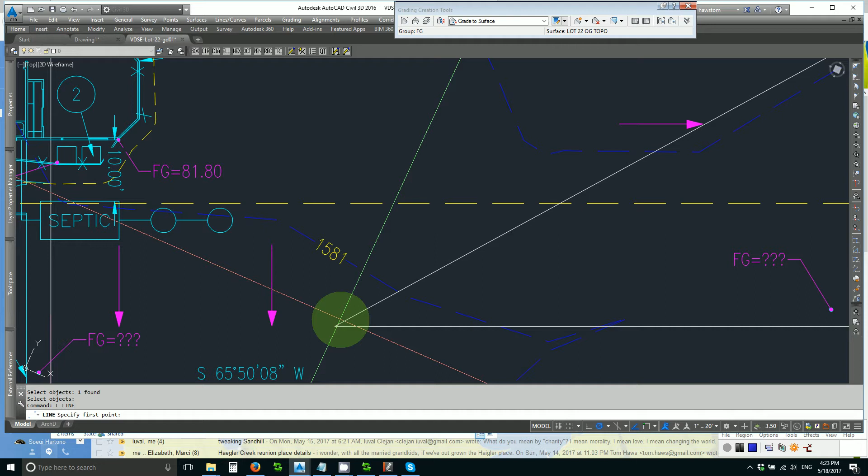My basin pre-design is done, and I have a polyline that I think represents what will be the bottom of the retention basin. The only thing that's missing is a finger up to the outfall that I have identified, so I will draw an arbitrary line across the vertex of this triangle and turn it back, leaving a little gap from which I can extend this closed polyline out to my outfall and back.

That's really important because I can easily do a projection grading with a closed polyline, so I'm going to use the join command. Now we're talking. I'm going to use fillet radius 2 to make these other corners pretty, and I think we can work with that.

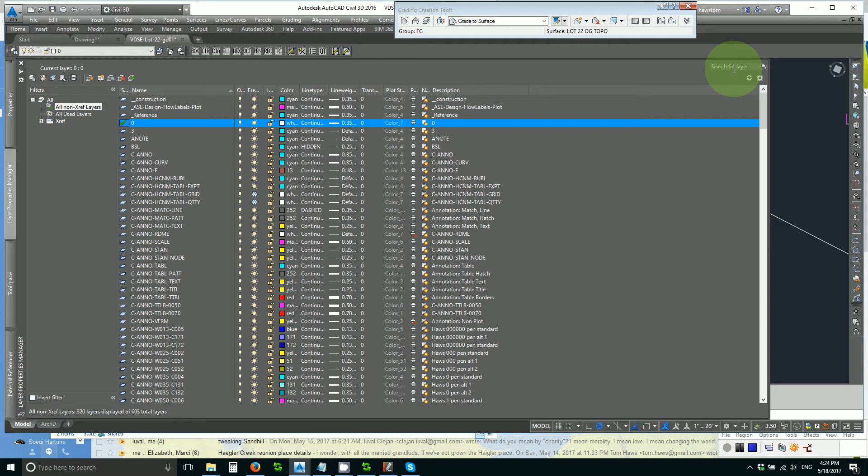I'm going to change this - let's look for all our feature line layers. I'll change this to a warp line since it's the bottom. What I'm doing here, I call it a tactical retreat. Then I'll turn it into a feature line on the finished ground layer, FG.

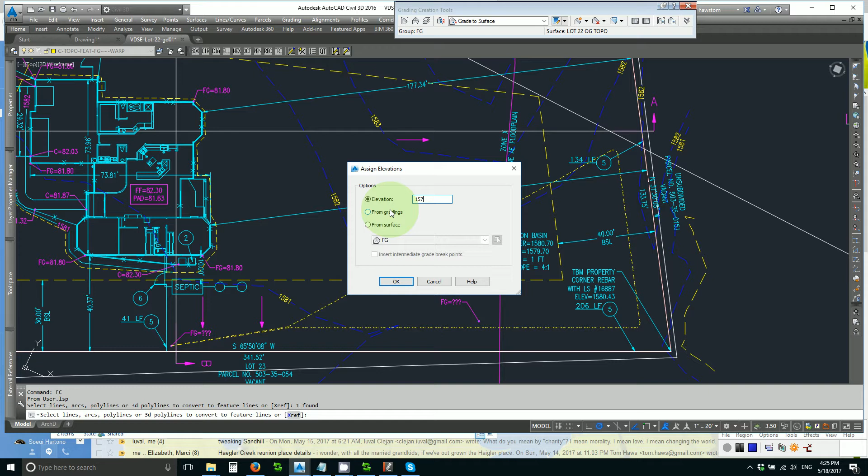I'll assign it to 1579.7, which is 1 foot below my high water. You'll see the high water before was 80.7, and when I hover here, it's going to outfall at about 80.73. So my high water is 80.7, and this feature line has been set at 79.7.

Now all I've got to do is raise this point to 1580.7, since that is my finger and that's where it's going to overflow. Now I can just do the projection grading. It's that easy.

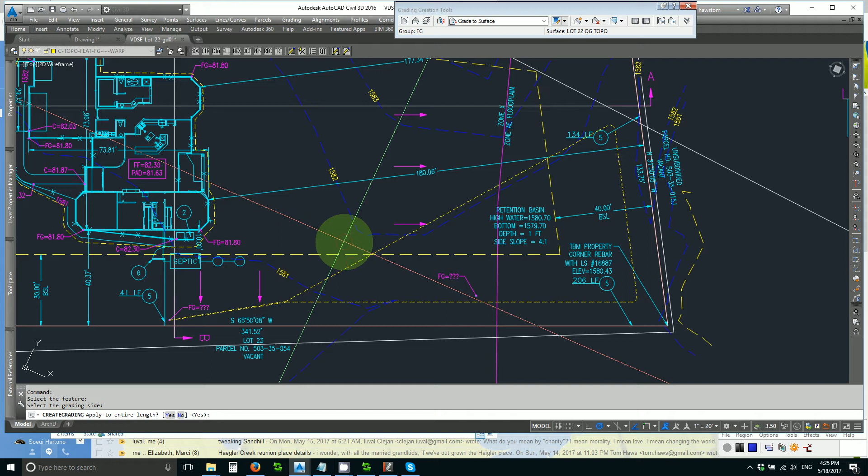No effort. Do you know what's missing? See if you can guess, or if you're ahead of me - I'm going to look at the object viewer, look at an isometric view, and there's a hole in my basin I need to infill.

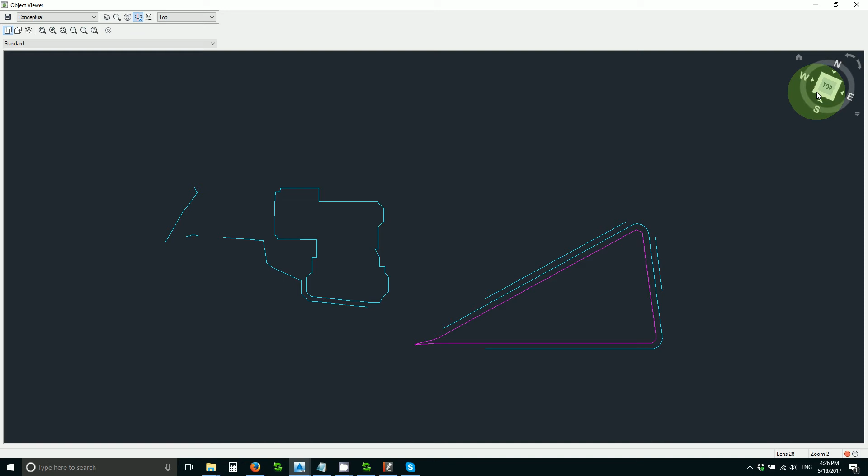The infill's done, and if I hover, I now get high water and finished grade, 80.7 and 79.7, and my object viewer will now give me a beautiful picture of my basin with my finger.

All I need is my volume, and my grading group can give me that. 5894 - I've become a little bit short, so I have to start over again.

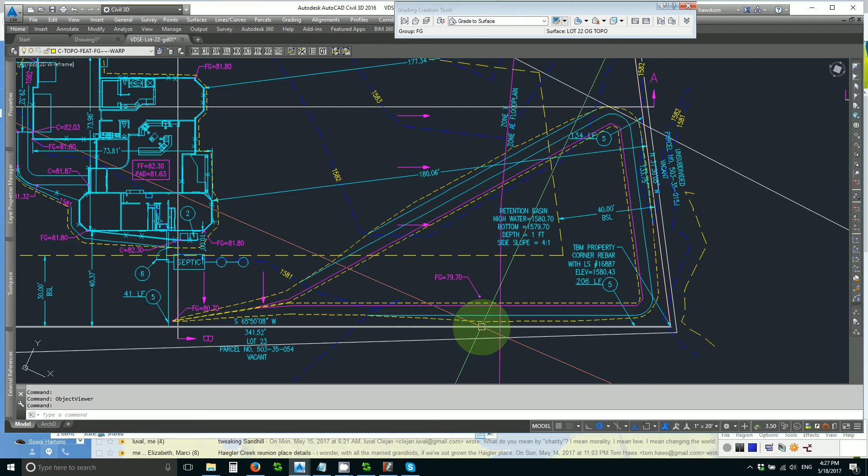I'm going to pause the video while I make it a little bigger. I've erased and exploded everything, but before I can continue, I need to flatten everything, because Civil 3D does not like to make funny 3D polylines.

Now that it's flat, I can offset it a little bit, and I'll pause while I finish.

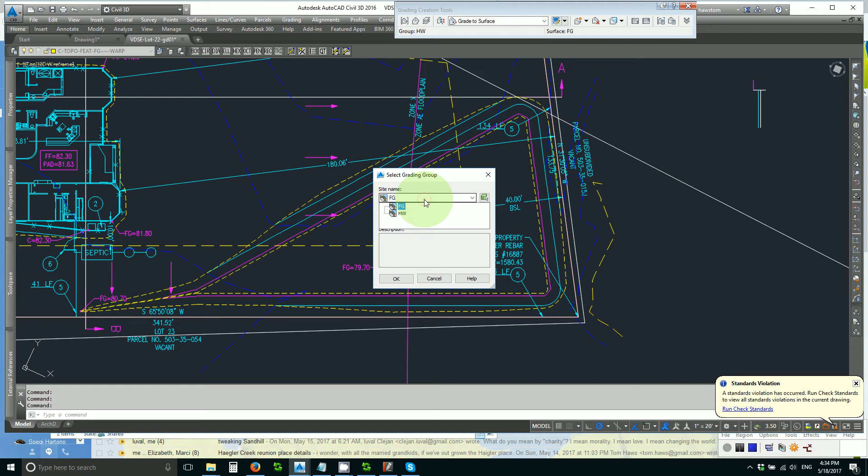Well, whoopsie daisy, I made a little mistake. I was looking at the FG group volumes, which are dirt volumes. I need to be looking at the high water group volumes, which are the retention volumes, and that's 6310, which is almost perfect in the first place, as our pre-design suggested we would be.

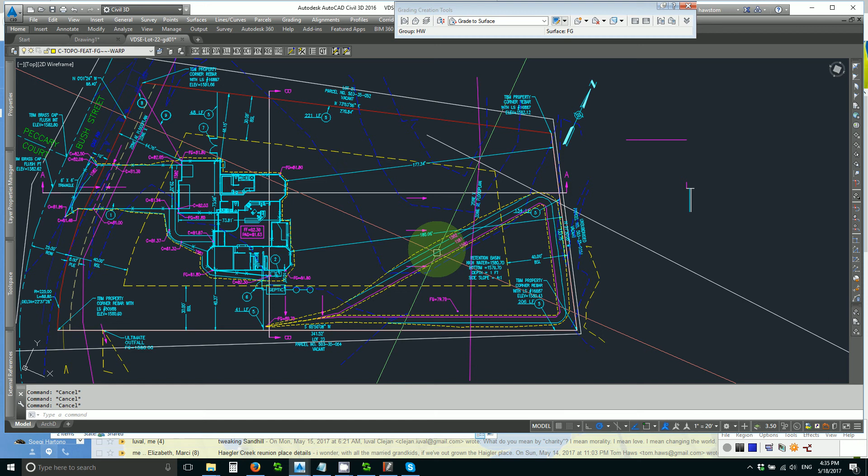Okay, we'll right click on our surface, go to properties, and under analysis, user contours, we'll say we want one, and we'll make it at 1580.7.

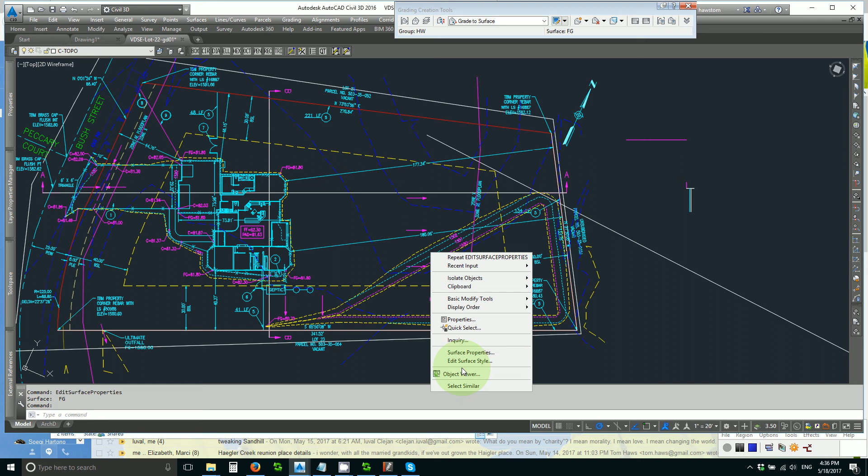Then we'll go to surface properties or surface style and show user contours. Now lo and behold, it shows. Let's copy this.

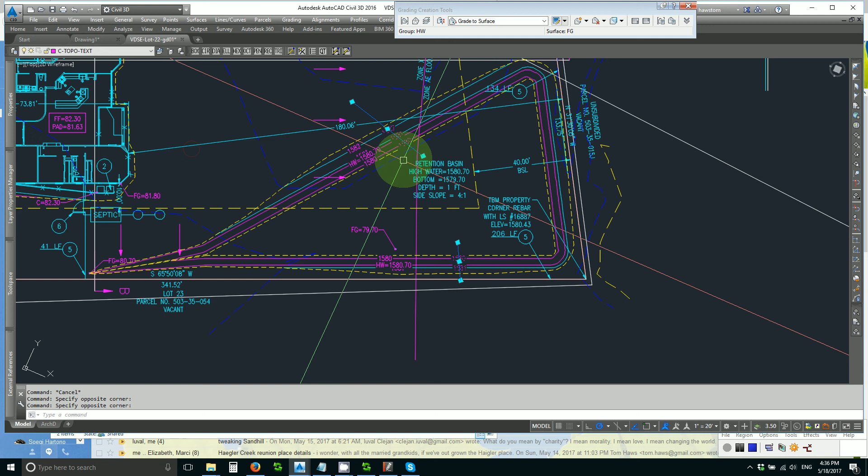And let's change these two to not show the user contour labels, and then let's just shorten these two so that all we see is the high water labels. Either way would work just fine - shortening them or turning off the other two, right?

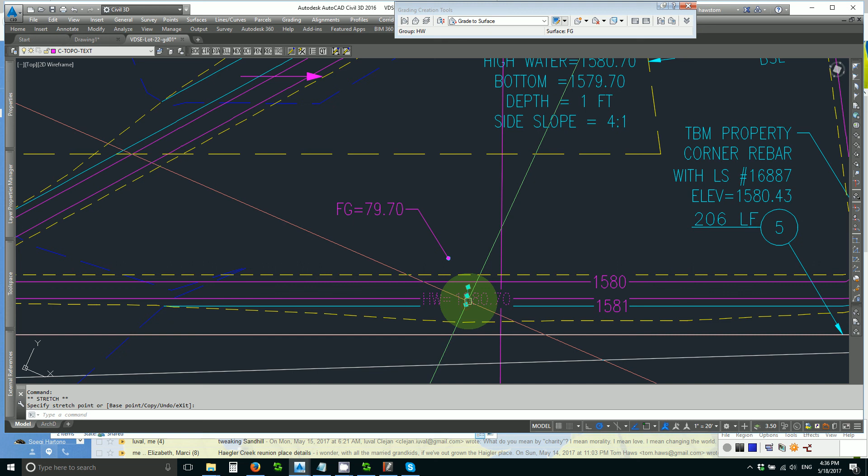All right, and that's our Civil 3D basin model.

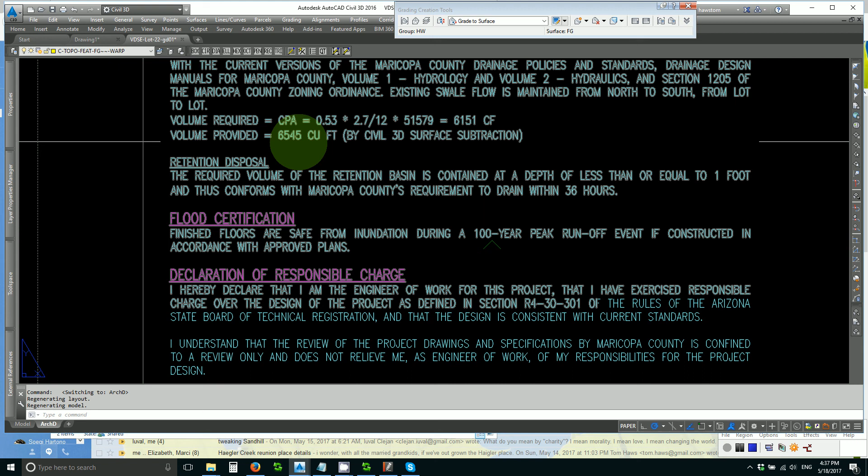Let's just write our volume down in our drainage report, 6545, and we'll be done, and we'll go on to the next step. 6545 by Civil 3D surface subtraction.